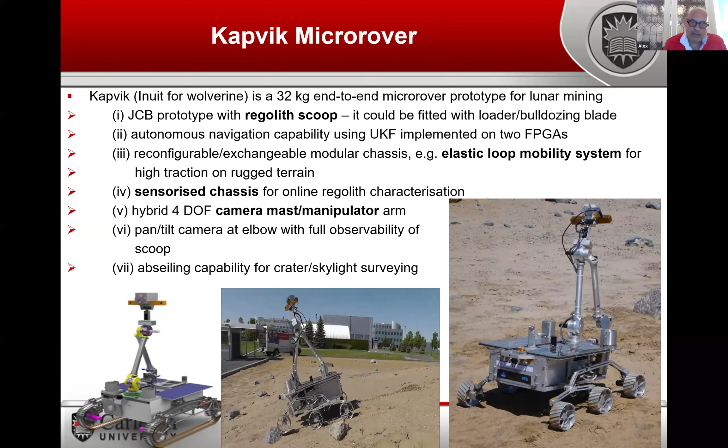So this is some of the things we were doing. One of the methods we wanted to use the rover for was geotechnical survey. According to terramechanics, we can get an idea of rover performance by measuring something known as drawbar pull, which involves the interaction of the vehicle wheels with the soil. From that, we can estimate sinkage.

We used a neural net model which enabled us to extract soil cohesion and friction angle estimates as we drive along. This one on the left is the cohesion, on the right is the friction angle. These are fairly fundamental geotechnical data you'd want if you want to site things like lunar bases, and also for examining traversability of terrain.

So this enabled us to do this. This is just the chassis by itself undergoing field trials at Petrie Island, a small island not far from Ottawa. We used this as a kind of emulation of essentially the Martian surface. The graphs you see are basically measurements of load, and also the tilt angles of the pivots that we've mounted the wheels on.

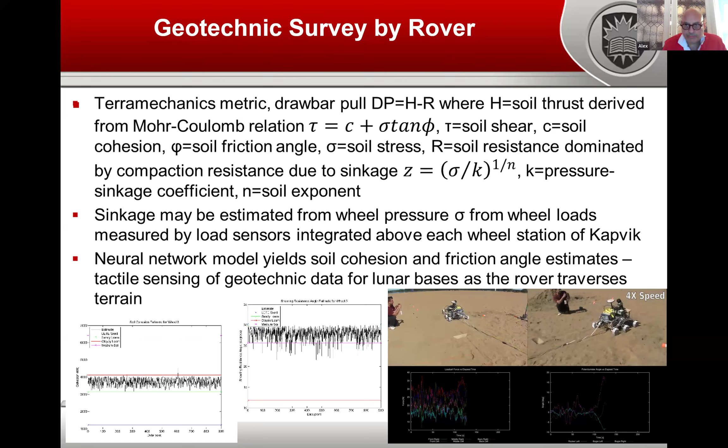We also field tested, one of the things we wanted to look at was the idea of a deep lunar mine, a subsurface lunar mine. We wanted to look at the repeatability of the potential fields autonomous navigation system we'd developed on a test rover. This shows the rover driving itself, not controlled by the student, who is merely following it with an emergency stop in case something goes terribly wrong. We used the potential field technique to allow navigation around narrow passages.

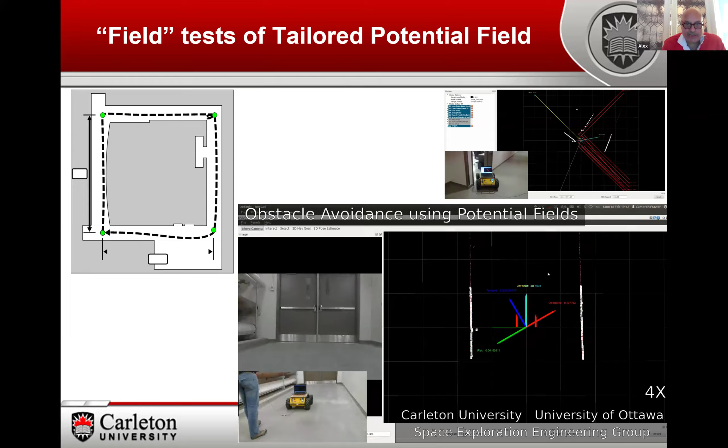So where does this leave us? Rovers can be used for surveying, geotechnical and otherwise, but also for surveying for minerals. This is where we get into in situ resource utilization, which is NASA's term for space mining. Space mining or extraterrestrial mining and manufacturing impose certain challenges which generally don't occur in terrestrial environments.

One is that energy generation is local, so we have to generate it locally. There's no grid. We can't use manual labor because astronauts are expensive, so we have to do this autonomously. We need to ensure everything we put on the moon can be maintained robotically without people. We can't use heavy equipment because that's expensive to put onto the surface of the moon. We also have limited geotechnical data for siting infrastructure.

And of course there are various environmental constraints like vacuum. The dust environment is a terrible environment, actually. We have very wide temperature fluctuations, and there's radiation and micrometeorites as well. And of course there's partial gravity on the moon, which is negligible actually on asteroids if we were interested in mining there.

Now, most of the Americans have been focusing on accessing lunar water. There's an estimated average of about 5.6% water ice by mass in these cold traps in the poles. These are permanently shadowed craters. Most interest is focused on the South Pole. The cold traps are about 40 Kelvin, so ice collects in these locations, which are potentially mineable.

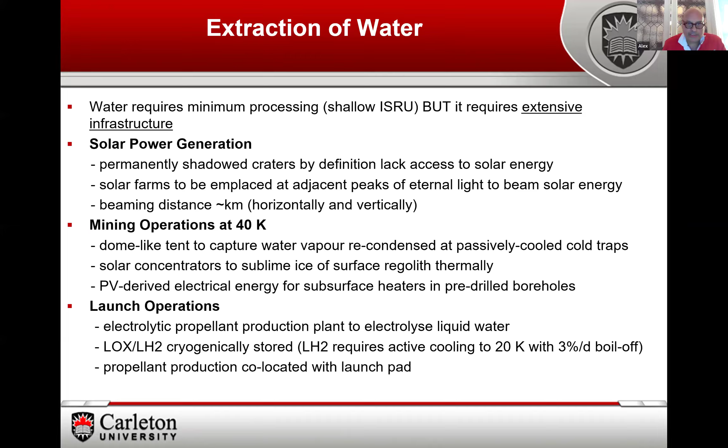So why do we want this water? Well, to get the cryogenic propellant, liquid oxygen, liquid hydrogen, it has the highest specific impulse of any kind of chemical rocket. It's also well known in spacecraft engineering. Any spacecraft engineer will tell you that the propellant and oxidizer constitutes the highest mass fraction of all space missions.

That is, the cost. Now, the primary goal for mining water on the moon is to fuel human missions to Mars, staged from the Lunar Gateway, which will at some stage in the future be in a highly eccentric polar orbit around the moon. Now, if we look at the Mars Design Reference Architecture version 5, the delta V, that's the amount of propellant we need to get to Mars from the moon, is about 3 kilometers per second. And this is done in 3 legs.

And this shows you the amount of propellant and oxidizer we need to get to Mars. It's basically 568 tons required from the Gateway to get to Mars and back. So the idea is that we also need to launch this propellant and oxidizer into the Gateway orbit, and this imposes an additional delta V of 3.7 kilometers per second.

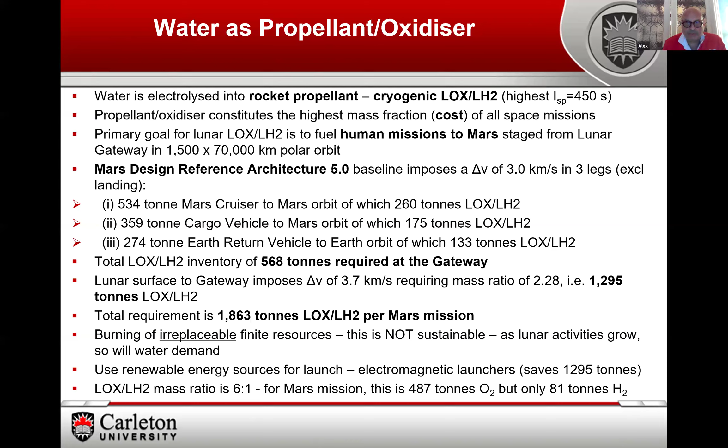In addition, in the future, we're going to need water on the moon. A human consumes about 4.4 kilograms of water per day.

6 kilograms per day, and this amounts to about 40 tons of essentially water per year. The current methods of closed-loop ecological life support systems offer fairly high recyclability of water and oxygen. It's about 80% for water and about 95%, I think, for oxygen.

We also want water for regenerative fuel cells. We'll also need water for lunar agriculture. The soil is toxic, so any kind of agriculture to support humans on the moon will have to be done through hydroponics, and so this means water. But this water can be recycled. We'll also need water for industrial fluids, things like lubrication, machining coolant, drilling muds, and so on.

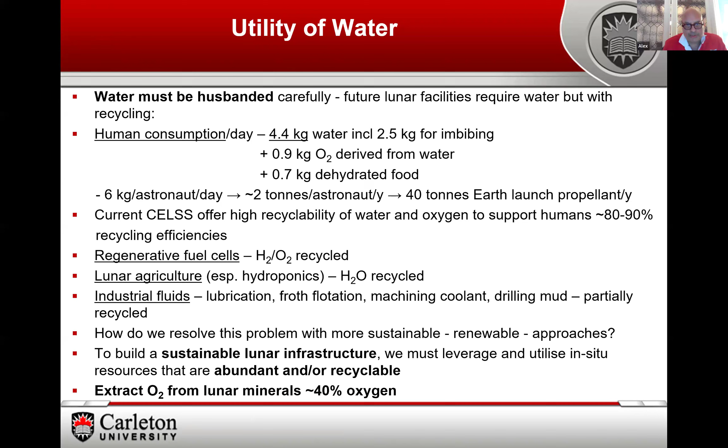So I do believe that if we are going to try and take advantage of the moon as a source of propellant, we should be focusing on the oxygen and not on the hydrogen and the water.

So let's take a step back and look at the mineralogy of the moon. The moon has a range of resources from volatiles, the regolith and minerals, and so on. But there are several constraints on the moon. It's deficient in certain elements, most notably copper, sodium, and halogens. And indeed, zinc, tin, and lead are also deficient. So this has impacts for things like solders and brazing alloys.

In addition, there's very little organic material, so we can't utilize plastics on the moon because we can't manufacture them from local resources. So these constraints define gaps where we can perhaps make substitutions. For example, instead of copper, which we use as an electrical conductor, we can use aluminium. And we can exploit material multifunctionality, which I'll show you in a few moments. For example, aluminium basically is a multifunctional material that can be adapted for many different applications.

This will require some reagents to be brought from Earth because of the lack of halogens and sodium. So we're proposing that we bring salt with us to the moon, which we use as a source of reagents, but these are not consumed, they're actually recycled, and we'll see that in a few minutes.

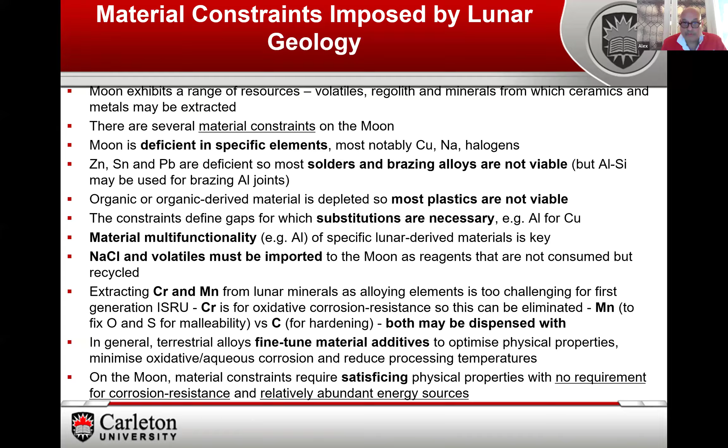So the lunar geology is relatively simple. It has a few common rock-forming minerals: plagioclase, feldspar, and particularly anorthite, which we'll look at in a moment. Pyroxene, olivine, ilmenite - these are the main minerals.

So what we've done is create this demandite concept, where we map functional material requirements with the available resources on the moon. In fact, about 10 basic materials can supply the full functionality of all subsystems required of a generalized robotic spacecraft. And again, we only require a minimal set of reagents - something like carbon, nitrogen, and sulfur, which we can recycle, and we import salt from the Earth.

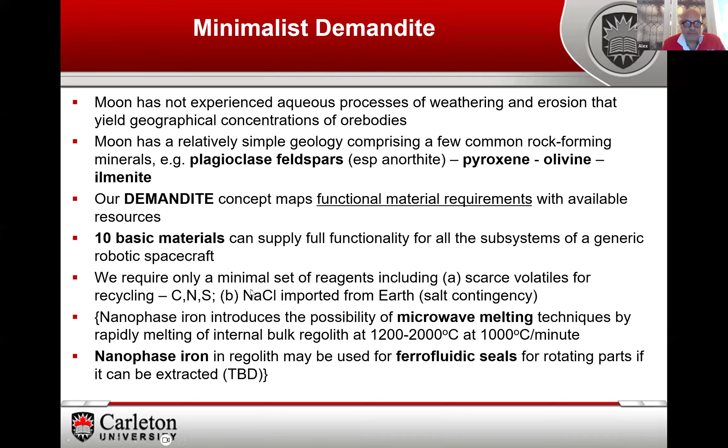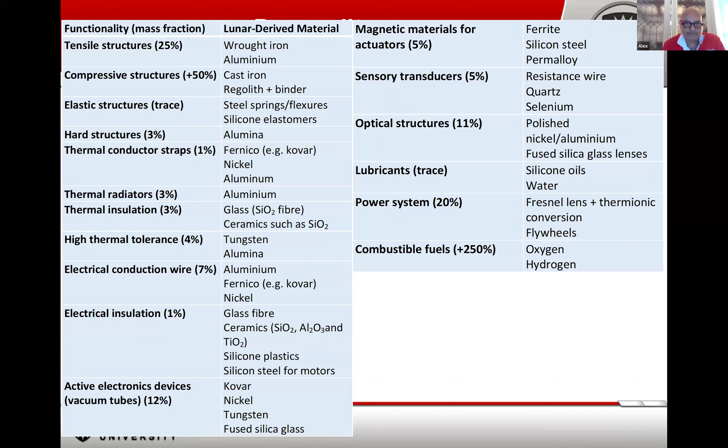So what we have to do is start processing this material. Obviously, the more processing you do upstream, the more energy you save downstream. So the earliest parts of physical processing are quite crucial.

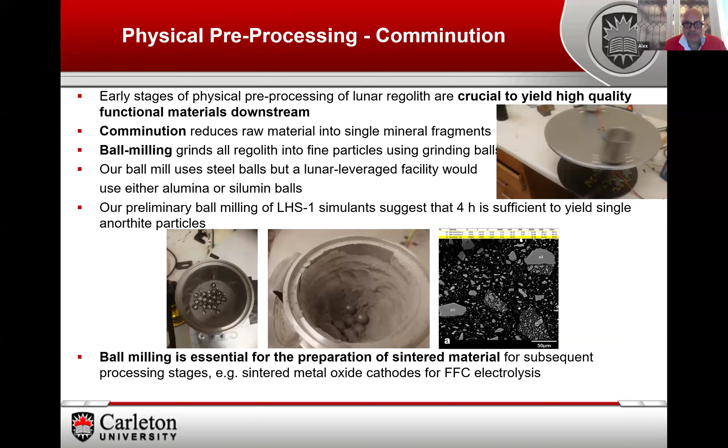So we've been doing things like ball milling experiments. This is our ball mill here in my lab, and we've been grinding the regolith particles using balls into essentially single mineral particles, and that's what you see here. This is the result - an electron microscope image of the individual particles we've ground. This is actually essential for preparing material for subsequent downstream processing.

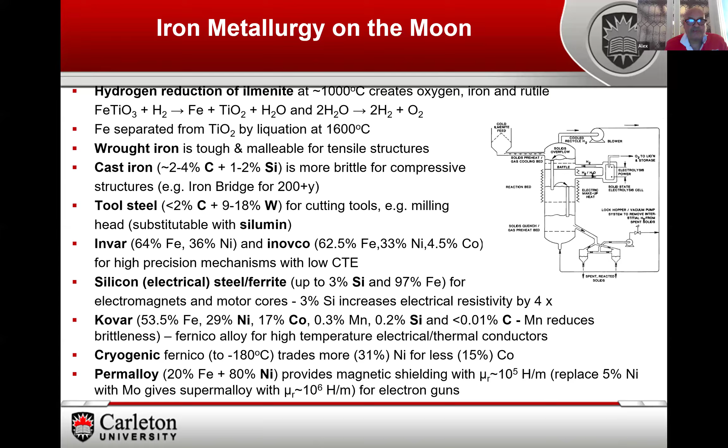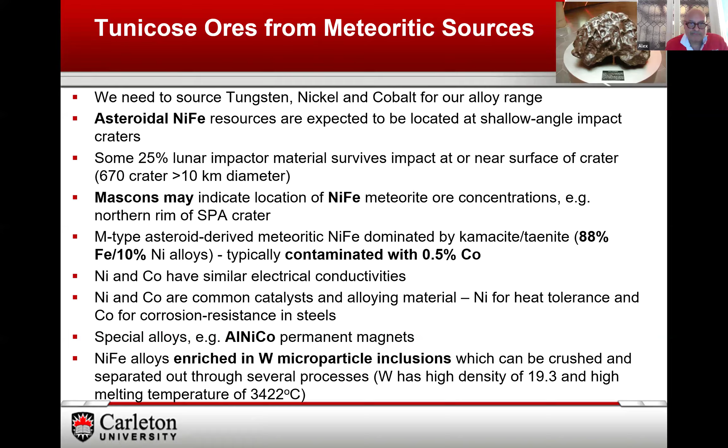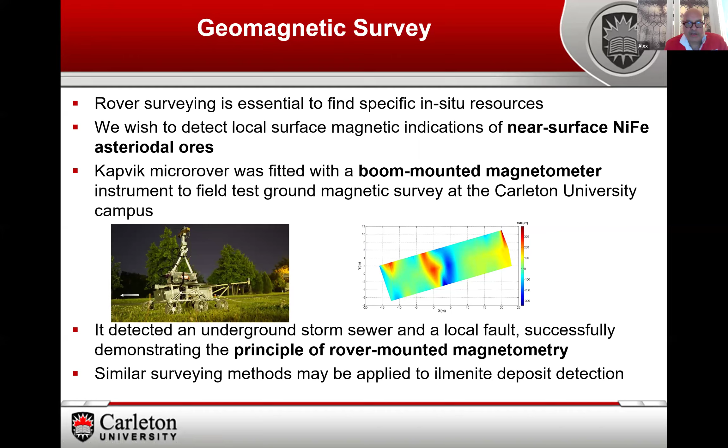So when we were at Carleton, we decided to try to search for or emulate whether we could find nickel iron material using magnetic surveying. We fitted our Kapvik rover with a boom-mounted magnetometer and basically ran a magnetic survey of campus. What we did detect was actually an underground storm sewer and a local fault. So we demonstrated we can use magnetometry to potentially search for magnetic signatures.

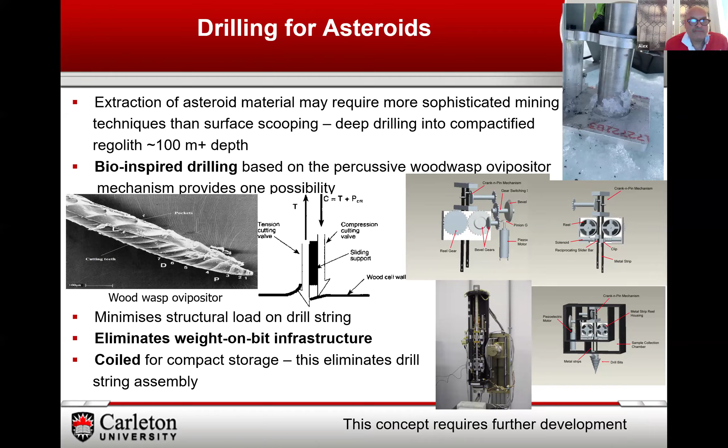So once we've extracted this nickel iron from the subsurface, we need to separate it. There's a technique called the carbonyl process, which is extremely dangerous, because it basically converts metal into vapor, which potentially you could breathe, which would be disastrous. Once it's in vapor form, the carbonyl form, we can fractionally distill it, decompose it, and then purify it back into its metal.

We do need a catalyst for this, sulfur, but we can recover sulfur from troilite. Troilite fortunately occurs in meteoritic inclusions that we get with M-type asteroid material, so it's already there with the metal, and we can extract this quite readily to end up with sulfur.

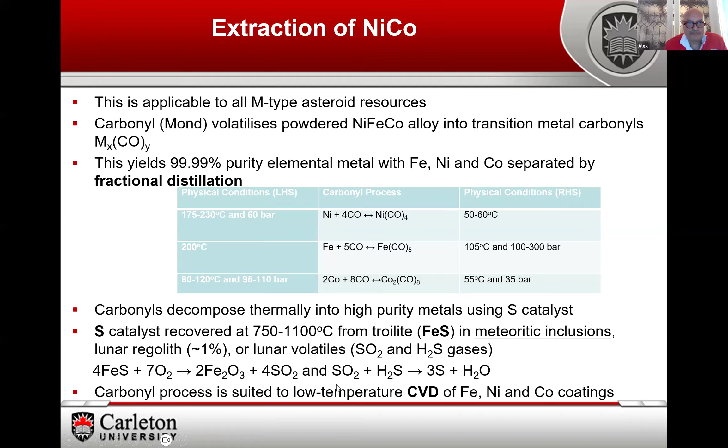Looking at another mineral, anorthite in this case, this is a very common highland mineral, and we've actually employed HCl leaching, which is essentially an artificial weathering process, and we've done this in the lab. We've managed to precipitate silica here, and we've also managed to extract alumina. We've taken this anorthite, used HCl and a little bit of water to essentially extract everything out of it. So we're utilizing almost 100% of this mineral.

Calcium chloride is also useful because we will need that for the next step. We can also apply a similar treatment with HCl on lunar orthoclase to create kaolinite clays. Kaolinite is the basis of porcelain. So we can start to build up a range of different ceramic materials as well.

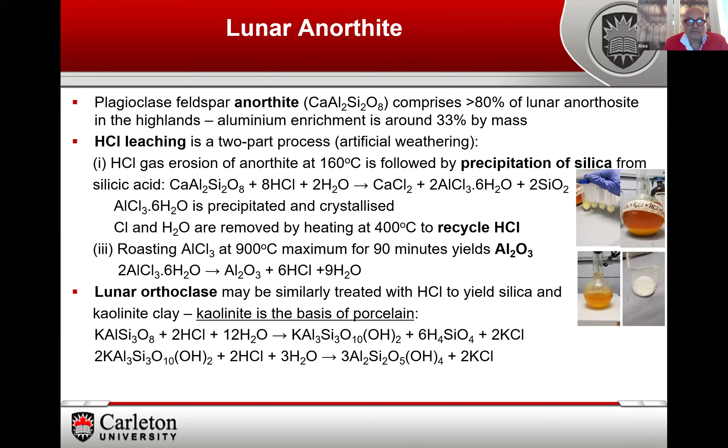Most people, when we talk about mining the moon, tend to focus on the metals, but the ceramics are also very useful. Alumina, for example, has physical properties second only to diamond. Silica, of course, is used also in refractory ceramics for thermal applications. We can also use ceramics for tooling and various other applications, and we potentially can manufacture cermet to provide a material with high strength and high temperature tolerance.

One of the difficulties we'll talk about later, when we discuss 3D printing, is that typically when we process ceramics, we tend to do it within a polymer binder. This is not viable on the moon because we can't manufacture polymer in any quantity, since there's so little carbon. But potentially one of the things we will be looking at is trying to process ceramics directly thermally using Fresnel lenses, and we'll have a look at that in a few minutes.

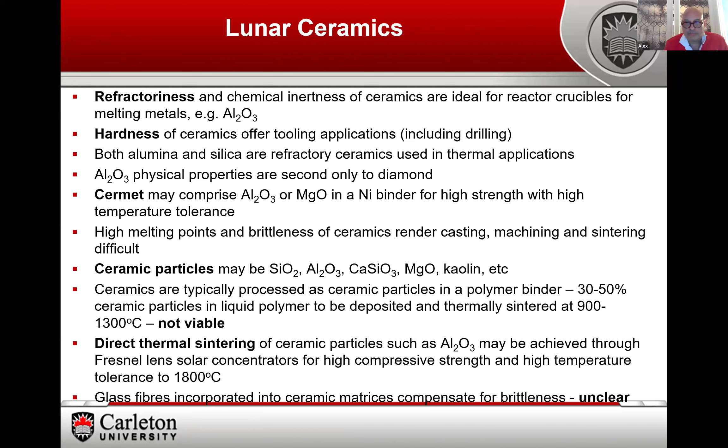This also points us towards creating glasses from silica. We can generate fused silica glass, which is also transparent, optically pure, and has very fine qualities. We can potentially manufacture Fresnel lenses, and we may even be able to manufacture things like optical fibers at some time in the future. But we're starting to build out, particularly from porcelain.

Many of you, I live in an old house which was built in 1912, and one of the problems with these old houses is they quite often still have knob and tube technology. But knob and tube technology, although it's not desirable now in houses, is still a functional way of doing electrics. So potentially we can do things like electrical insulation and so on. We could adapt knob and tube technology for lunar bases on the moon.

So this is our lunar industrial ecology. Now, I realize this is a very busy slide and it's kind of overwhelming, but we've already discussed lunar ilmenite, nickel iron meteorite processing, and lunar anorthite. But there are other materials we can extract. For example, from olivine we can extract magnesium. We can also recycle lunar volatiles, carbon, nitrogen, sulfur, and of course salt we can get from the Earth.

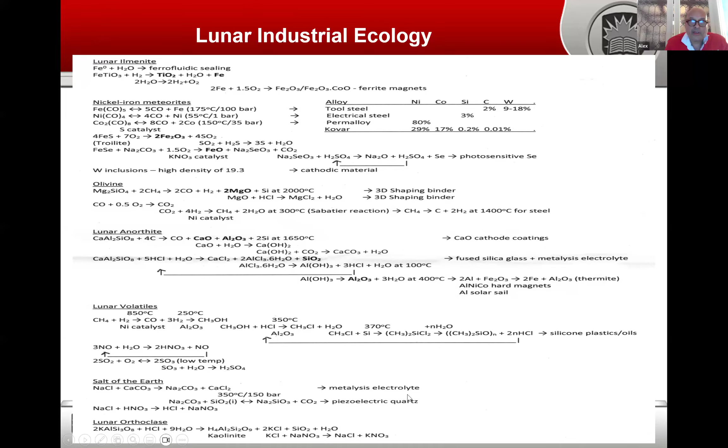So the idea is that our lunar industrial ecology yields us a set of metal oxides. So what do we do with the metal oxides? We need to reduce them to get metals as well. And we've already demonstrated this now since I wrote this slide deck.

We have taken a technique called the FFC process, which is called molten salt electrolysis, where we can reduce any metal oxide to greater than 99% purity. It's very energy efficient, requiring only relatively low temperatures, about 1,000 degrees or so. The material undergoes a solid state reaction, so the oxides and so on are not molten - the only thing that's molten is the salt. Oxygen is evolved at inert anodes, which can then be stored for human consumption.

So basically, it takes something like the alumina and strips out all the oxygen out of it, and we end up with aluminium metal. And we've actually performed this experiment in our labs just this year.

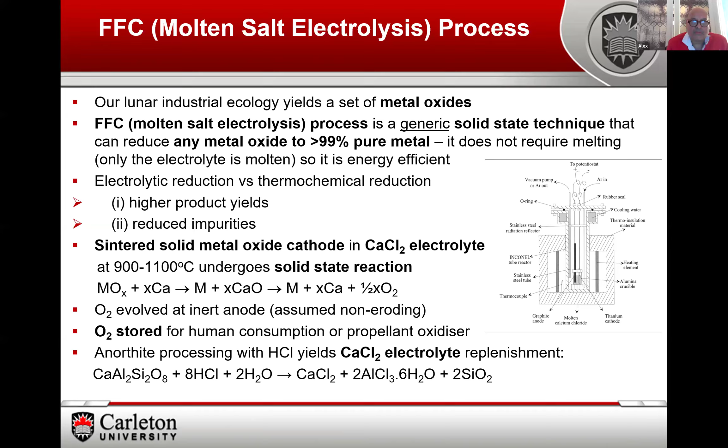This is an example of the technique applied to rutile, which is basically titanium oxide powder. This is the end result with the titanium powder after the process. In addition, this potentially could be 3D printed directly in metal form.

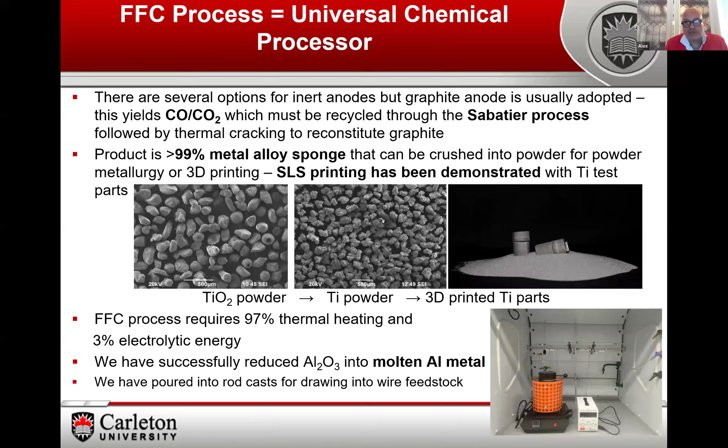In fact, we're also doing that ourselves with our own setup, where we've extracted molten aluminium, created rods, and then drawn them into wire feedstock for 3D printing using electron beam additive manufacturing, which we're doing with NRC.

Assuming that we've got rutile and we've reduced it to metal, we can start to create titanium alloys. So we have aluminium, we have titanium. We don't use vanadium, since vanadium is commonly omitted in medical applications anyway because it's toxic. So we can create things. We can also create with titanium alloys containing nickel, like nitinol, which is a shape memory alloy.

We've done experiments with this, as you see here, for solar sail applications. But one of the things we played around with was trying to create a shape memory alloy linear actuator to act as an artificial muscle.

One of the things you'll notice here is that the wires are very, very long. This is because the strain in it is only about 5%, so you're getting an extremely short stroke. This illustrates one of the issues with smart materials: you can either get good torque output or good stroke, but usually not both together.

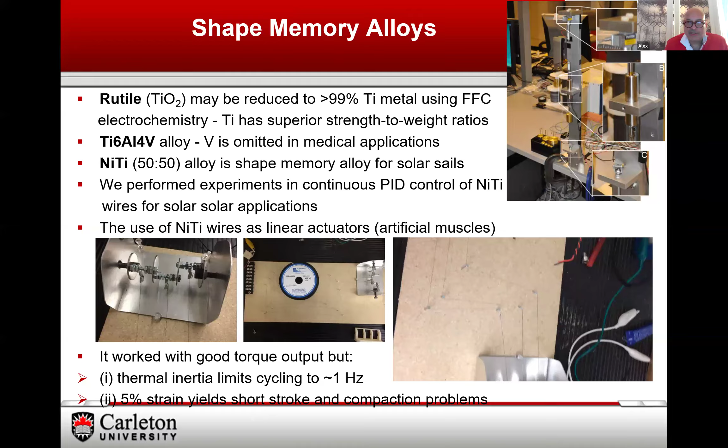Going back to aluminium, it's a multifunctional metal. It can be used as a thermal conductor, a thermal radiator, an electrical conductor, a lightweight structural material, and also as a welding material, as in thermite.

We can start to build out a set of aluminium alloys. So aluminium 1000 we've been working with in 3D printing. We've also created a version of 6061, which we've omitted the copper and chromium that's normally in it. We're currently characterizing this 6061 aluminium, the lunar version of the alloy that we've created.

And Alnico, of course, is a fantastically useful material for permanent magnets. We'll see why this is significant a little bit later.

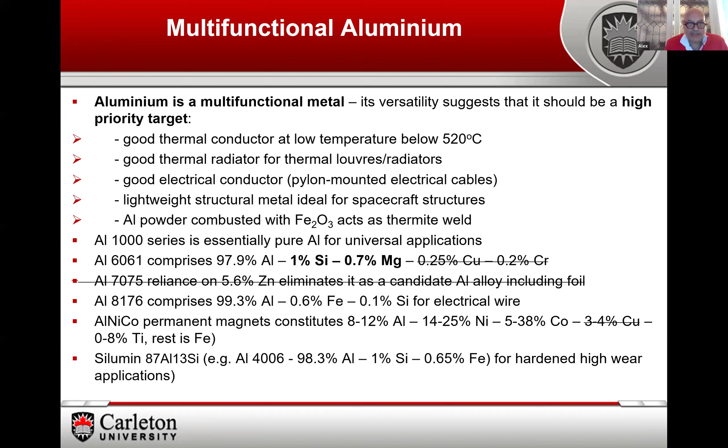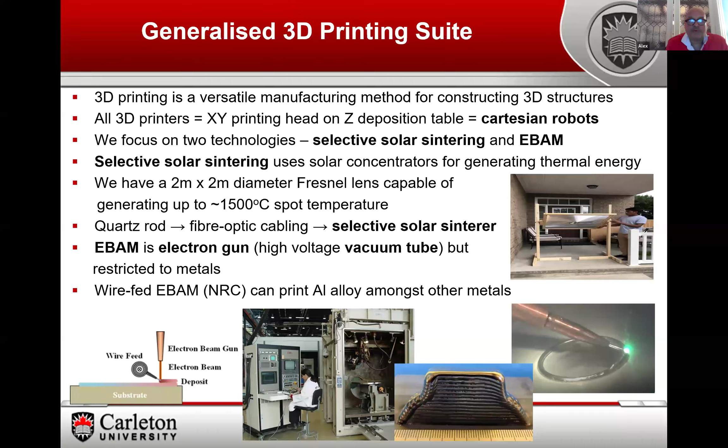So we've been working with NRC. This is the NRC setup, their EBAM facility, electron beam additive manufacturing, and we're basically building an aluminium structure to represent tankage that we could potentially do on the moon. I'm not going to mention any more about that because I'm aware of the time.

We're also creating our own multi-material 3D printer based on Fresnel lenses, and I'll just see if these videos will run all together.

So we've created our 3D printer, which is on the right. We're still in the process of building it. The idea behind our multi-material 3D printer is to use a Fresnel lens as a solar furnace to melt aluminium alloy. We've already demonstrated that we can melt aluminium alloy and deposit it onto silicone plastic insulation.

What we're trying to do is create this multi-material 3D printer, which has multiple heads: a fiber optic head and a silicone plastic extrusion head, shown here. With the Fresnel lens, we can basically melt aluminium and 3D print it.

There are various phases we want to go through to widen its applicability to steels as well. But we've come across a slight problem in that focusing the hotspot through fiber optics is quite the challenge, and we're currently scratching our heads about that.

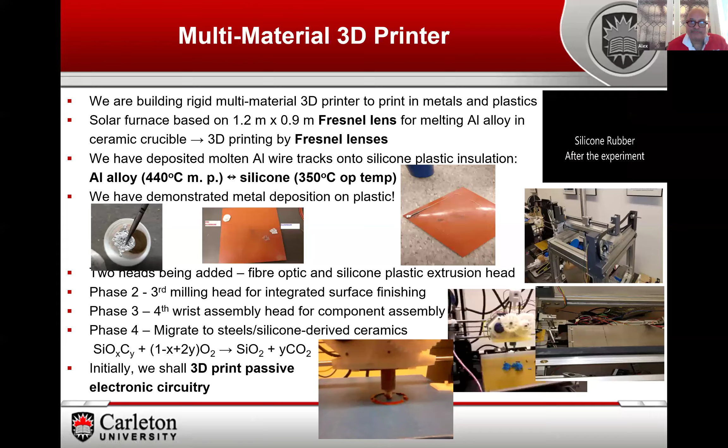So this brings us to self-replication. I believe that self-replication is the only robust way to do space exploration. What it offers us is the idea of exponential growth in productive capacity. So what we do is launch a single 10-ton self-replicating factory to the moon at, say, a cost of $7.5 billion.

So our initial capital cost of $7.5 billion is now amortized over this exponentially increasing productive capacity, and the specific cost has dropped to about 50 cents per kilogram of productive capacity.

So now, if each 10-ton factory takes 6 months to build, we have 1.5 million factories in just 6.5 years. That's a phenomenal ability to industrialize the moon.

So I think it's crucial that we try to develop this technology, because of the sheer attraction of it - it will transform the way we do space exploration, because self-replication effectively sidesteps launch costs.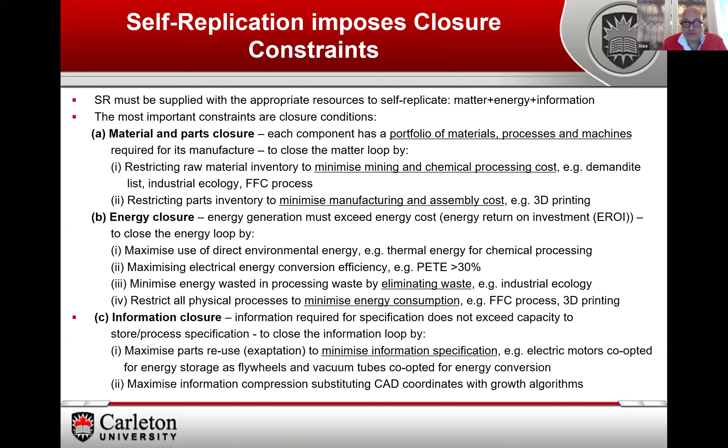So what I want to do is analyze whether we can represent 3D structures as growth algorithms, which would reduce the amount of information we need to store object coordinates.

So what is a self-replicator? Well, John von Neumann stated quite clearly that a sufficient but not necessary condition for self-replication is something known as universal construction.

A universal constructor is a kinematic machine that can manufacture any other machine, including a copy of itself, given the appropriate resources - matter, energy, and information.

In fact, this concept is a generalization of the universal Turing machine. So we can idealize this - as you can see in this NASA image - as a kinematic arm manipulating a sea of parts.

No, Rachel, you can't come in here. No, you cannot. No, go.

Sorry about that. So we can adapt this universal constructor. Hang on a second. Bear with me a minute.

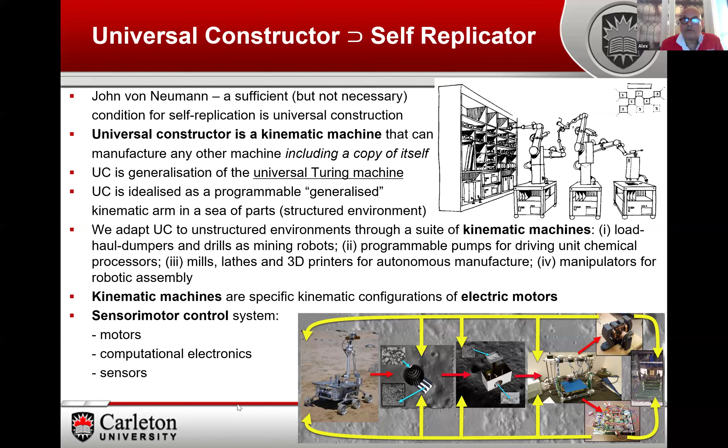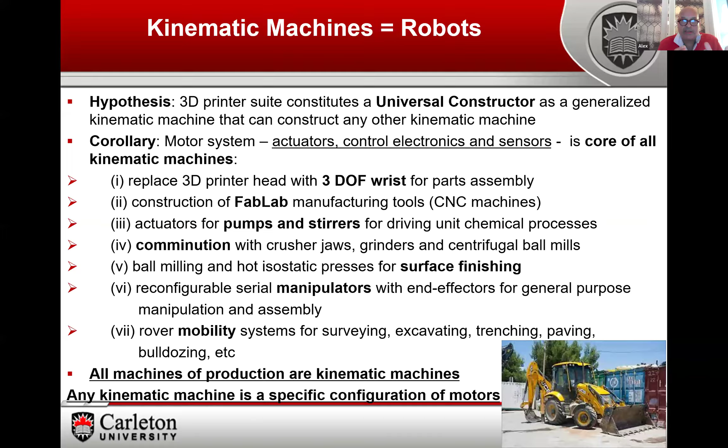The idea is that this 3D printing suite, and also various other types of kinematic machines, collectively constitute a universal constructor. The core is basically the kinematic machine, the motor. All machines of production are essentially kinematic machines, and any kinematic machine is a specific configuration of motors. This is why we're focused on the mechatronic components of kinematic machines.

One of the first steps, which actually inspired me quite a number of years ago, was the RepRap 3D printer. It can print many of its own plastic parts—particularly the white bits were printed by its daddy.

To convert that into a full self-replicating machine, we need to deal with the metals, the joinery, and in particular we need to 3D print the electric motors, the electronics, and the computer hardware and software. In addition, we have to have self-assembly, so this is a proxy for manipulator motors, and we also have to supply an energy source.

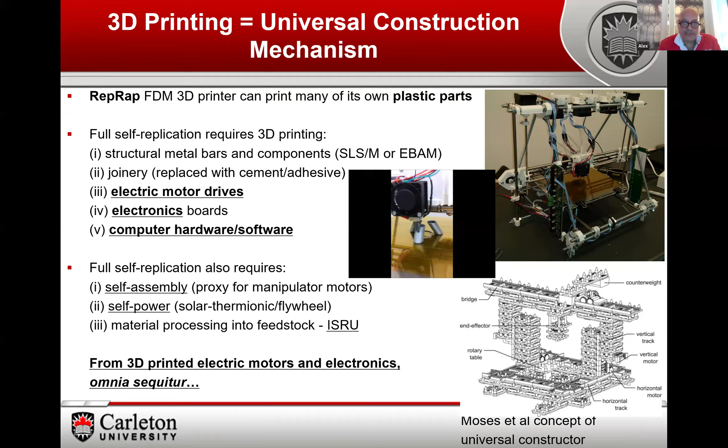We also have to process materials into feedstock for the 3D printer, which is what we've been discussing with ISRU. So from the 3D printed electric motor and electronics, all else follows.

We've actually been doing experiments trying to 3D print electric motors, going through various configurations. I'll show you this one, which was a dual excitation motor made out of soft magnets. We used this material called Protopasta, which was 50% iron powder in a 50% PLA matrix.

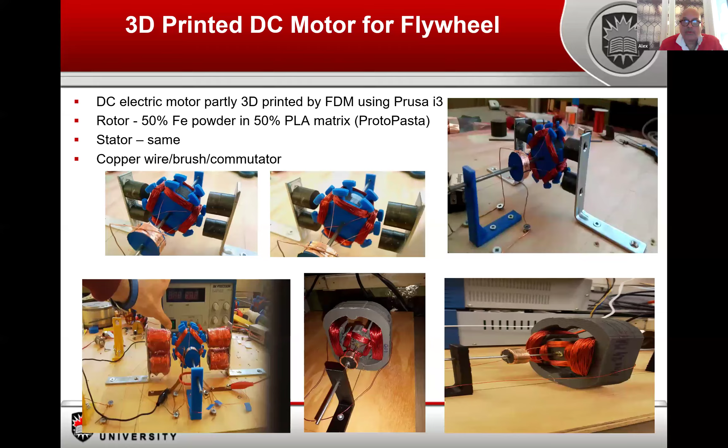We started to get better results once we got 3D printed permanent magnets from Oak Ridge National Laboratory, and this enabled us to start 3D printing more of the motors.

The biggest challenge we had was actually doing the wiring. We started off with pancake motors, using different approaches from photolithography to extruding a copper-based material. Of course, it melted at the high voltages we need for motors.

We ended up using a technique called laminated object manufacturing, which is basically creating a copper sheet and then etching it with a laser and pulling away the unwanted components. This was the pancake motor running, and it appeared to work quite well.

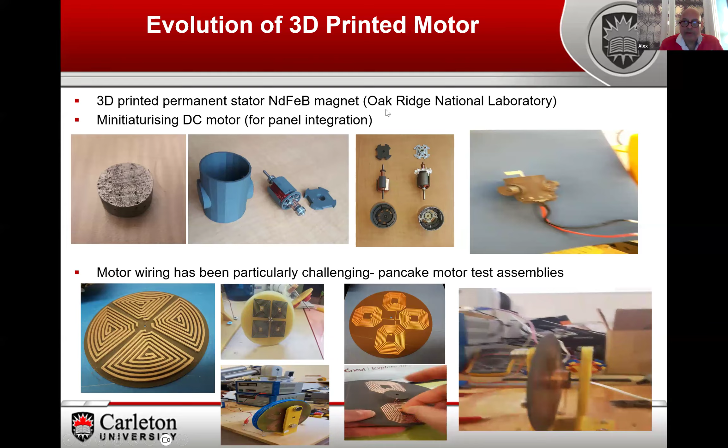But pancake motors are not ideal because they're very low torque. So what we did was create a generalized DC motor, and we did—this is what we created. Again, the difficulty was with the wiring.

As you can see here, the wire is fairly thick—unfortunately you can't make it into very thin wire if you're going to wrap it transversely like this. This we had to do manually, but nevertheless we were successful in building a fully 3D printed electric motor.

So we had soft magnets, and hard magnets from Oak Ridge. We're currently developing this further as I speak—I have a student working on this, developing it a bit further in conjunction with the University of Waterloo. So we've demonstrated we can 3D print an electric motor, at least in principle.

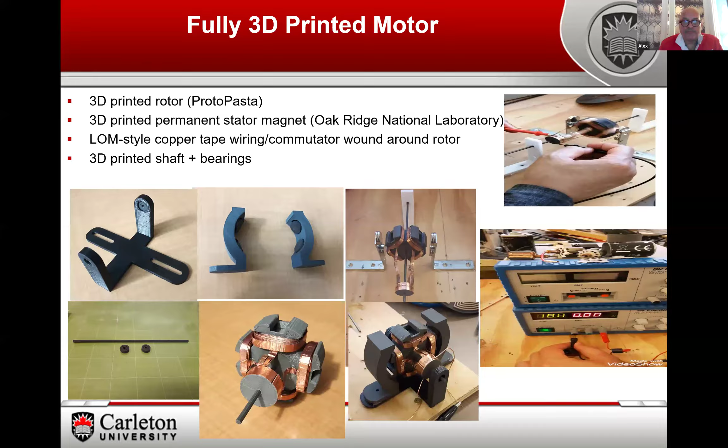What about sensors? We can potentially create sensors as well for tactility. The simplest piezoelectric material is quartz, and as we saw earlier, we've extracted silica from alumina, though we haven't converted it into quartz yet. That takes high pressure, basically melting with sodium carbonate, and then crystallizing the quartz hydrothermically—we haven't done that experiment yet.

But potentially, once we have quartz, we can do all kinds of interesting things with it—fairly accurate mass measurements in a quartz microbalance. It also provides the basis for tactility, for pressure sensors, giving us the potential for creating tactile sensing in robotic machines.

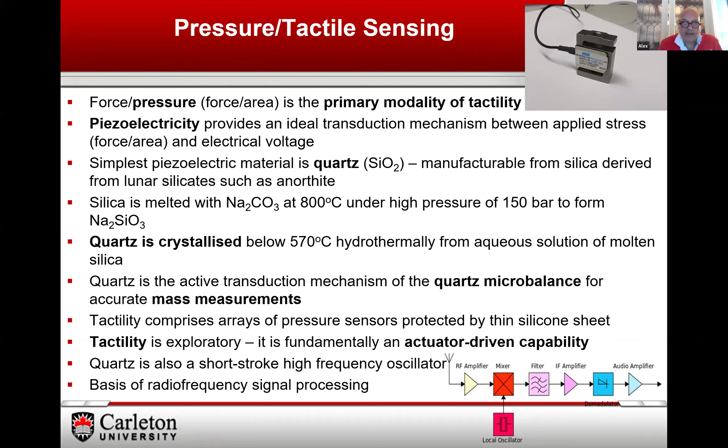We've also been looking at how to create a camera. Now, I focused initially on selenium, found in association with sulfur in carbonaceous meteorites, so we can extract this quite readily. We haven't demonstrated this, mainly because we've kind of discarded this notion.

One of the things we're looking at now, working with an Estonian university, is using troilite essentially as a photosensitive material. This is going to be much easier than finding selenium because of the very low ratio of selenium to sulfur. There's a lot more sulfur in asteroidal material than there is selenium.

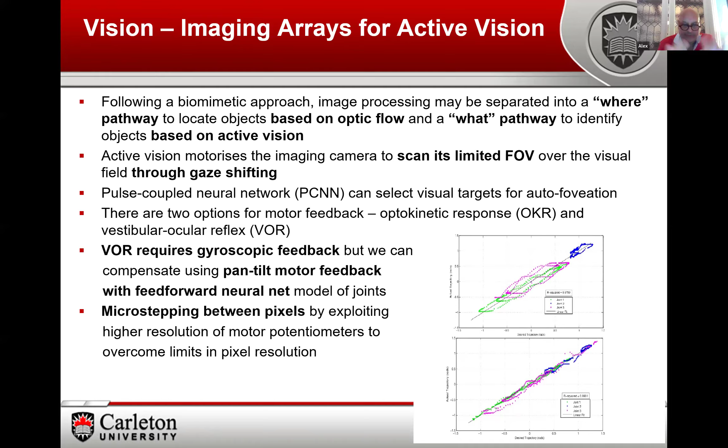So what about electronics? Well, we can't use solid state electronics on the moon because we don't have the materials and the sophistication there. But potentially we can go steampunk and use vacuum tubes, which are thermionic devices. Tungsten we can access, the coatings we can access, nickel we can access, cobalt and silica we can all access.

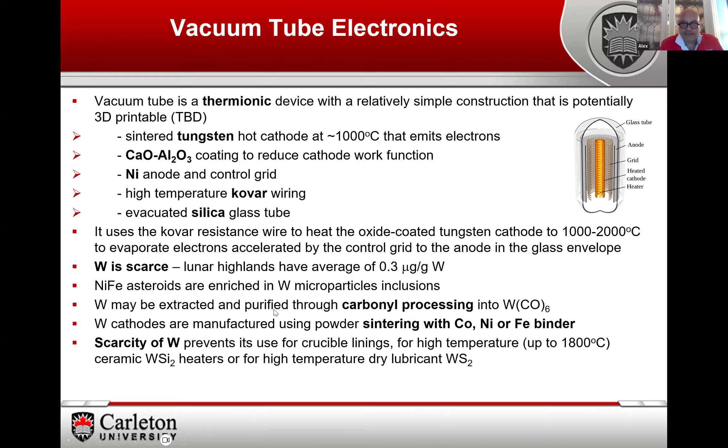So potentially we can manufacture vacuum tubes from lunar sources. We haven't actually done that. What we have been doing is looking at different architectures. Now, if we try to build a CPU out of vacuum tubes, it'd be the size of a block of flats.

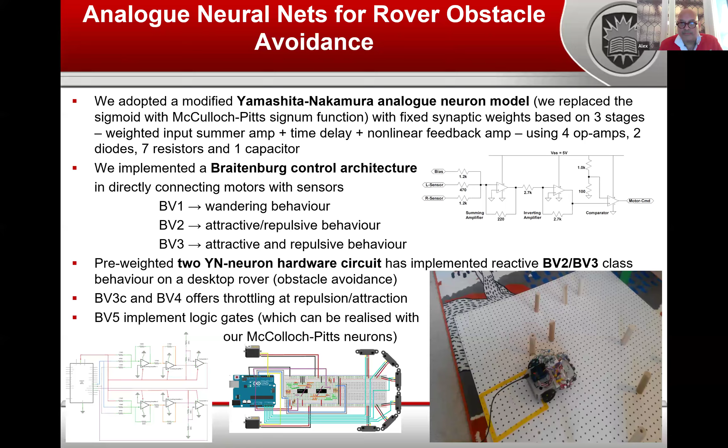So what we've been doing is looking at alternative architectures, and in particular neural net architectures. We've been building analog neural net circuits to implement very simple behaviors in a simple rover, just to demonstrate the principle of using neural net analog circuitry as our computing medium. This is actually using just two neurons. This little rover basically has a charging cycle and discharge cycle that's causing it to jerk, but the actual principle of obstacle avoidance was demonstrated just using two neurons.

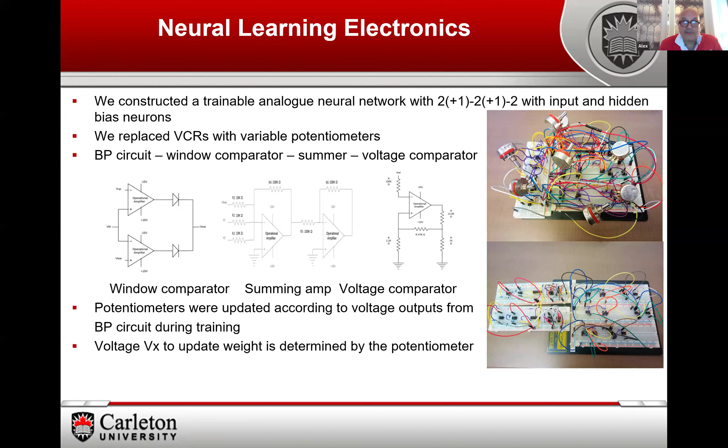Beyond that, as well as neurons, we've also been looking at implementing the back propagation algorithm in circuitry, and we successfully did this as well. This is basically two boards: this is the forward board through the neural net, and this is the back propagation board, which allows us to change the weights of our neural network. And we've done this actually in hardware. This rover was trained with a very simple function to stop at an obstacle.

Although that seems very, very simple, I think it's the first time this has been shown to actually implement a back propagation algorithm in a circuit. So this means we can update the weights in our neural net circuit, but unfortunately not the topology, which actually potentially is an advantage because it imposes a limit on what the neural nets can learn. This potentially is a useful way of stopping the self-replication process if necessary.

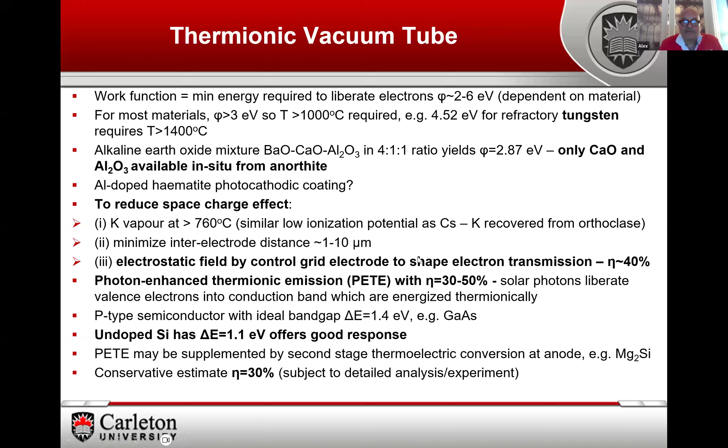Okay, I'm going to skip over the thermionics. Basically, I've already mentioned that we can use thermionics for energy conversion. There is a technique called photon enhanced thermionic emission, which potentially gives us 30 to 50% conversion efficiency. We also can use flywheels, which are motors with a rim, to store energy over long periods, and potentially we can get 100 watt-hours per kilogram specific energy storage using glass for the rims.

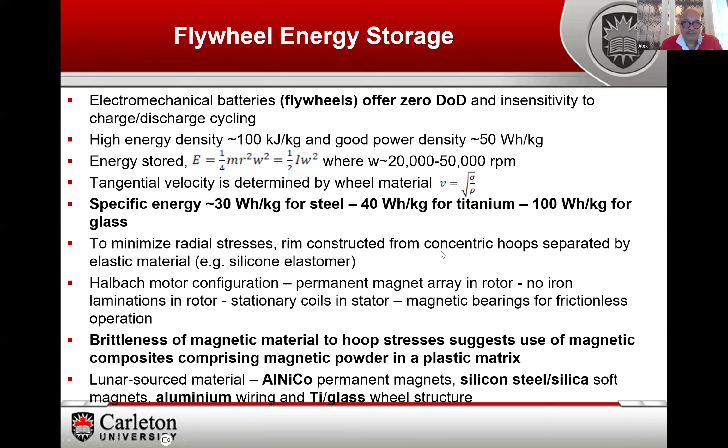So why self-replicating machines? Well, I think to industrialize the moon - why would we want to do that? I think it's very important for us to do that because I believe that we are setting ourselves up for a disaster in the near future when it comes to fossil fuels and terrestrial renewables on Earth.

One of the things I'm interested in is solar power satellites, or space-based solar power. It becomes attractive because it has many of the same properties as fossil fuels, but not many of the disadvantages of terrestrial renewables. If you look at the power density of renewables, they will potentially be competing with other land uses, whereas with solar power satellites you can get orders of magnitude greater power density, meaning less competition for land use.

To cut a long story short, if we tried to provide our energy needs using space-based solar power, we'd need a huge constellation forming a geostationary ring around Earth. It would provide energy 24 hours a day, 365 days a year. But the cost would be $75 trillion, which is enormous, so that's not feasible. The only way to build such a huge fleet of solar power satellites is to use resources already in space, on the moon and in asteroids.